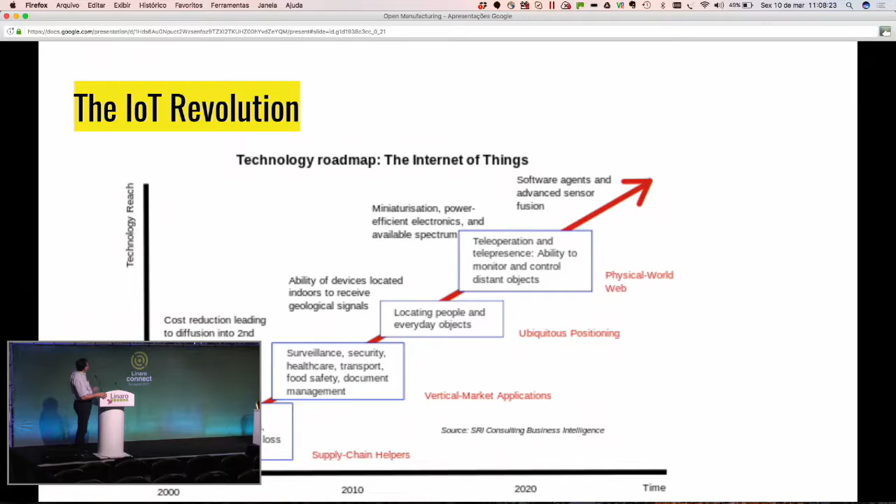So that is the IoT revolution in theory, but in practice we know that will not work. Why? Because of the gap. Mind the gap.

At the same time that SoC complexity grew almost 60% per year, we—Linaro people, software designers—we cannot pace the same rate of deploying software, boards.

And before, when people talked about the design gap, they thought only about software. But the gap is not about software, it's about everything, the whole ecosystem: software designing, manufacturing, certification. We need to put all pieces together.

When we see the hard time that we have in our companies, it's because customers don't want a single LG, Samsung, or Huawei cell phone solution. They want diversity. And sometimes we are anxious about this diversity because we know how hard it is to deploy this product diversity.

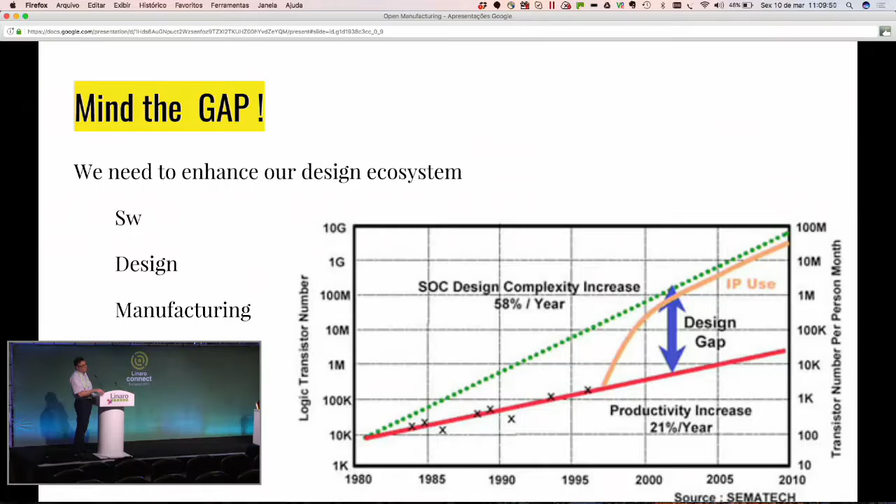And that's about the gap. The design gap is much bigger than only software. It's about everything, including manufacturing.

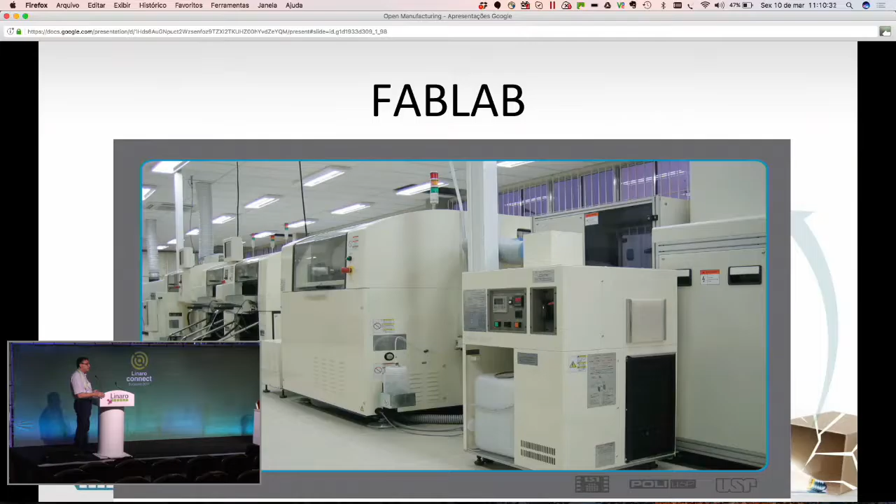So here's our Fab Lab. Yes, it's a factory, a state-of-art Panasonic manufacturing line, but also a lab, because we don't want this machinery targeting high volumes. That's the responsibility of traditional industry. What we're targeting here is innovation—how we can take advantage of this infrastructure to help people who want to do innovation in the field, and sometimes don't have the means to work on a small series.

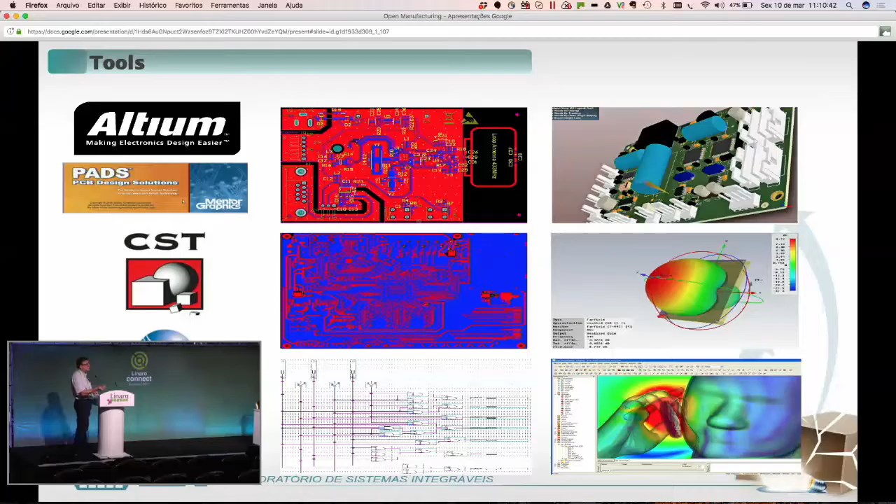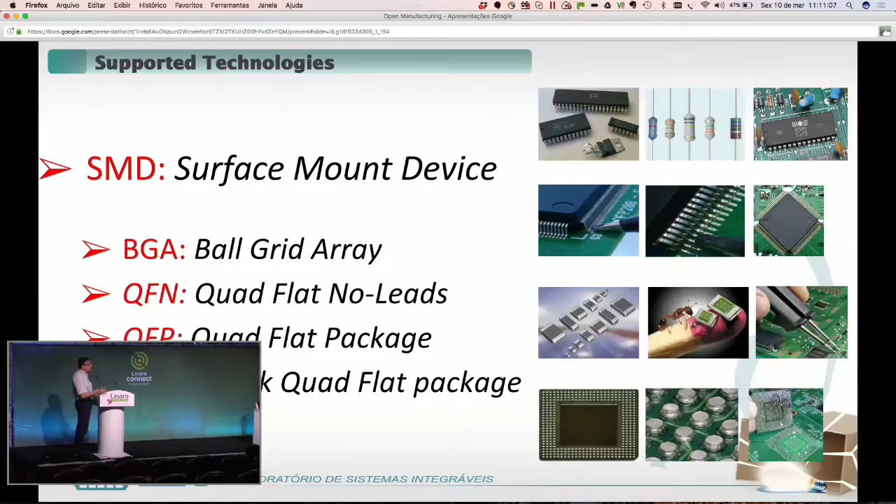So here is our infrastructure. We have everything from layout, schematics, RF simulation, to manufacturing, including screen printing, pick and placement, and the oven. Particularly, we are not interested in things industry is already doing, so we don't do PTH, but we do a lot in terms of fine pitch SMT. Just to give an idea, we can inject 60,000 components per hour, because these machines are fast.

Probably you've heard about Industry 4.0? Have you had a chance talking with Panasonic, Fuji, or Siemens people about the implications of the 4.0 wave in this industry? It's amazing—production rates will be even higher—but there's a big mistake because everyone is looking for low cost, high productivity, high quantities. The problem from the design point of view is still there. Sometimes we need small quantities in the early stages of the design process, and that's something big companies don't take care of. And that hurts us, the Linaro community, the design community.

So what's cool is that as these big machines are also becoming smaller, we have high precision small machines that can do really small series—let's say 10 boards, 5 boards, 20 boards. We have this big machine that's 25 meters, almost 100 feet, but also these small ones. That oven is this size, and very precisely we have the same resources as the big machine in these small ones. Everything is targeted at quick prototyping, quick deployment, not only for research but achieving industry standards.

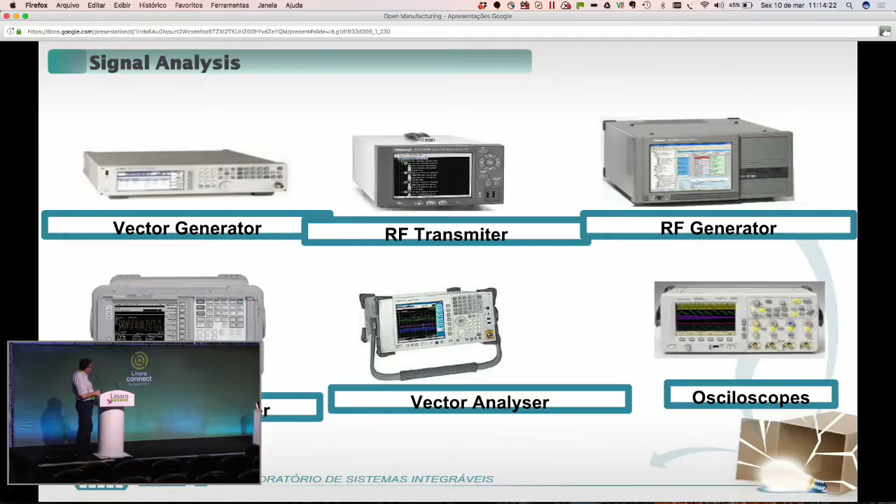So a lot of equipment for certification, including wedge bonders, microscopy, three-dimensional volume-based analysis, PCB routing, oven—we have all available. And finally, we have equipment to do signal analysis too.

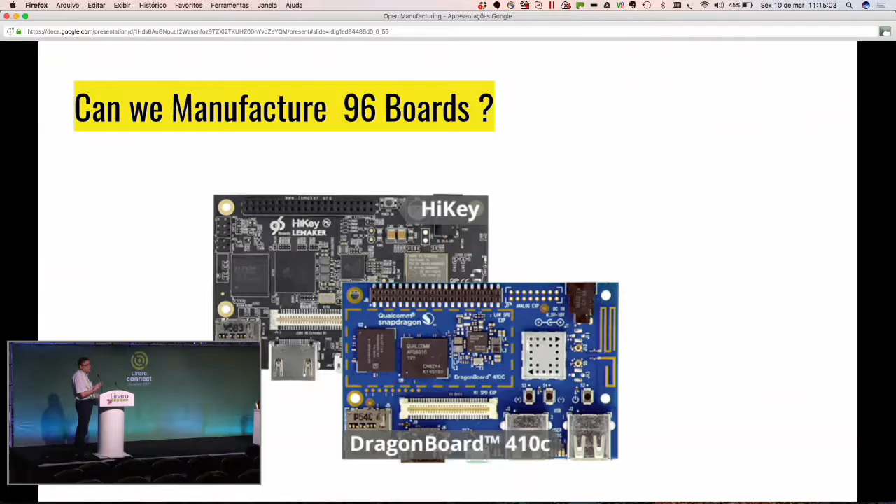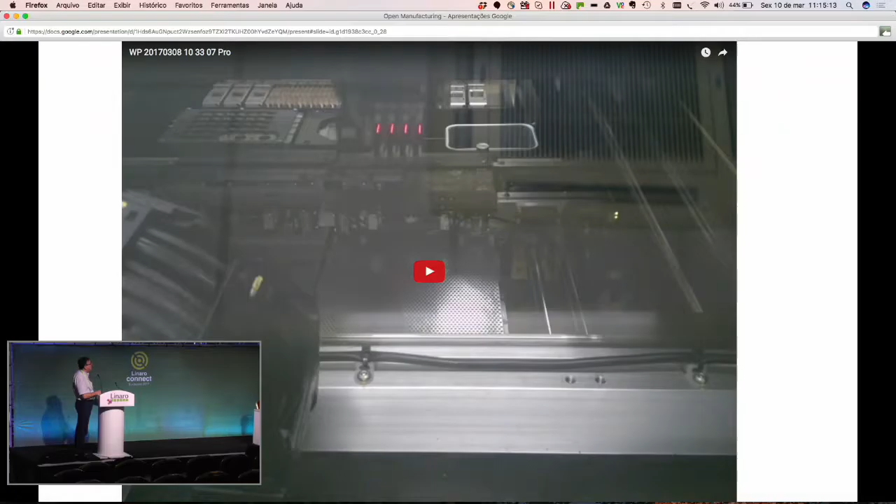So many people are asking if we can manufacture the 96 boards. We say yes. At this moment we are manufacturing some boards from a company named LeMaker. Unfortunately they are not here today, but we licensed from them the design of the board named HiKey. In our machine, using only 20% of its capacity, we are able to manufacture a board in only 75 seconds. So in less than one hour we can manufacture something like 45, 50 boards, and then certify them. I have a video about manufacturing this board—it takes 75 seconds, but it's quite boring. I won't show that to you.

So that is it. In the design gap—before, people were focusing only on software problems—we want to enhance and open up the process of manufacturing, and share that with the community here. So if anyone here has limitations facing manufacturing, please send a note to me, and eventually we can help you on this challenge.

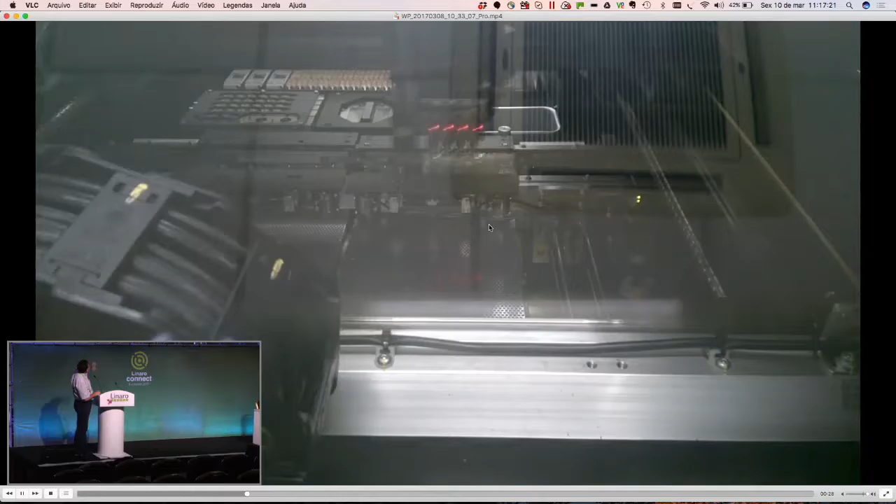So we have 6 feeders, and that is just one. Oops, I'm sorry. So what they're doing here is placement positioning, to test the quality of the precise positioning. We have 8 heads per feeder. And here is the manufacturing of 4 LeMaker HiKey boards. We are using the same component because the idea is to do a dummy manufacturing run to evaluate the positioning precision.

That they did yesterday, and today we start to position the real components, and then later this afternoon we'll do the X-ray to evaluate the solder quality, because we are trying to guarantee 100% yield.

And also we already profile the oven, and that's something really cool. We have a profiler with 16 channels. If you have some very special certification needs, we have the precision tools to do that. And again, we don't need to compete with high-end, high-volume companies. The idea is to keep small series just to promote innovation, so you don't need to wait in the queue for that.

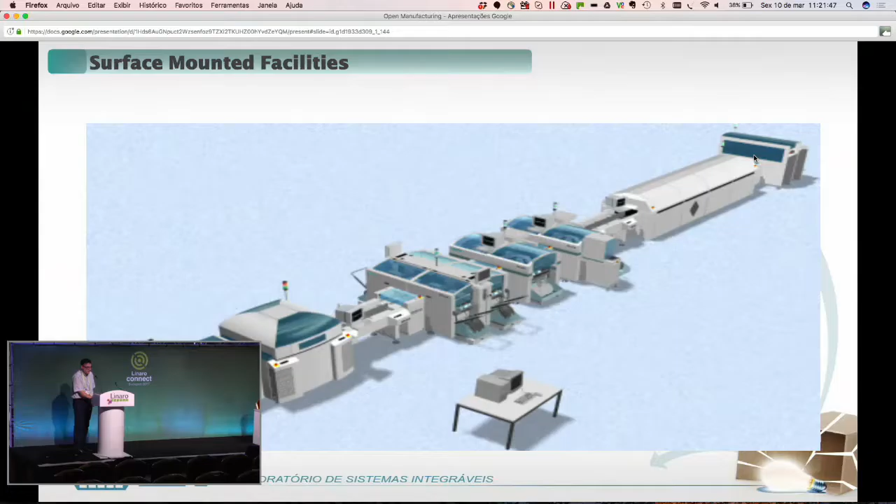And did you consider maybe taking some share of your production time, run time, and offering the maker community a cost-effective service for production of PCBs, for example? Couple hours a week, you accept some orders from real people, or who walk the streets, who want to make some PCB, and make it for them.

In our model, we are the university, so we have problems making money. That's why we just started up 3 companies, and these companies are responsible for the business. One of these companies just built a business model where their costs for small manufacturing are reasonable, and in fact it's cheap for a small series. So we have this dual mode.

We want to support the maker industry, but you know, sometimes makers don't have a methodology behind them, and here we need to keep the methodology. So the university is the guardian of the equipment, because we need to have our equipment certified - we need certifications for FCC, CE, Brazil. Because of that, the equipment needs to be certified, but we are opening part of the production if the community obeys the certifications, because it's reasonable and cheap - in fact, it's not expensive.

And we also have this small company that is targeting, from the business point of view, manufacturing small series for business purposes - when you need, let's say, 50 boards, 60 boards, 100 boards. During this week, when we started to share this idea, we heard horrible stories of people trying to do a small series, even from big companies like Qualcomm and others. So we structured ourselves - I am from the university, I am also the chair of this NGO, but I will be very happy to introduce you to these companies that will take care of the business part, including the business for the makers, because we want to make clear to makers the whole structure that considers this too. When we talk about the maker space, it doesn't mean it's free - there is also cost associated.

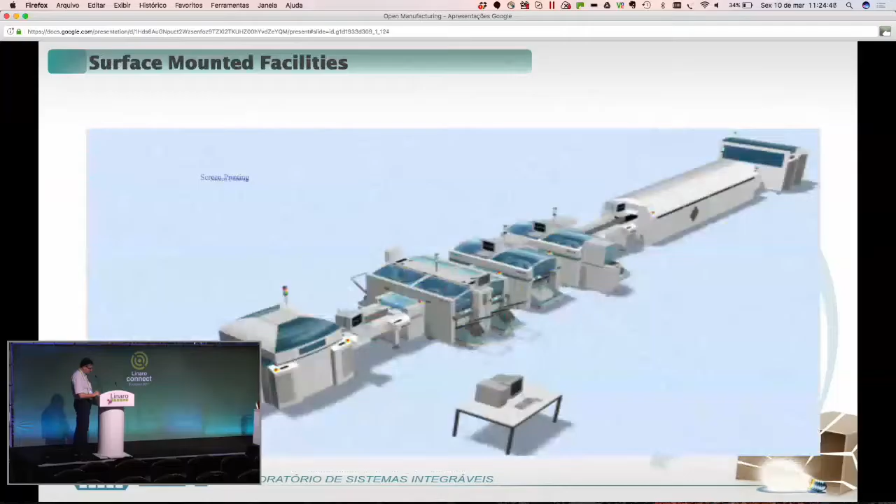That's a lot of money for a person to have in their home. But if you had a maker lab, or a bunch of maker labs put together, they could afford to buy those and then spread the cost across everybody who would use them. The issue is trying to get people to create the input to be successful in creating their design.

That's one of the things university could help with, to help them understand how to submit your designs to that style of lab so you will be successful. And also to help you set up with an agency like Arrow or something like that to purchase the components. So when you submit your design, you'll be able to get components from Arrow delivered there, they can be manufactured, you pay a certain amount for manufacturing, and you get 1, 2, 3, or 10 boards out of that.

Once you've done that, now you've got something which you can submit to a larger machine, if you wanted to have 100 boards, or 200 boards, or 300 boards. So developing that type of flow is something that would be very good.

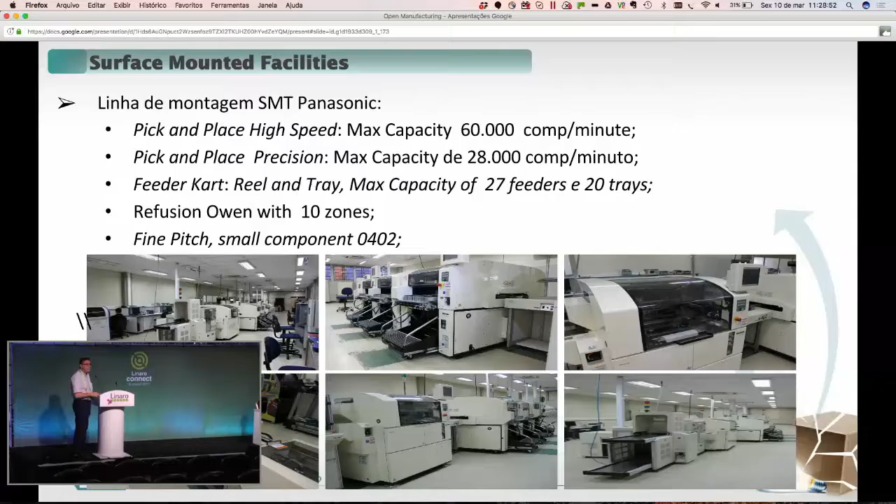This machine is ultra complex. We need to have a visit from Panasonic every month to check everything. And now we're discussing with Panasonic, since we are targeting this small scale thing, we want to put the machine on the cloud so people will be able to track the process.

And also, we have a partnership with a German company named LPKF. These two companies are our partners. They need to visit us every month just to keep the machines perfectly running.

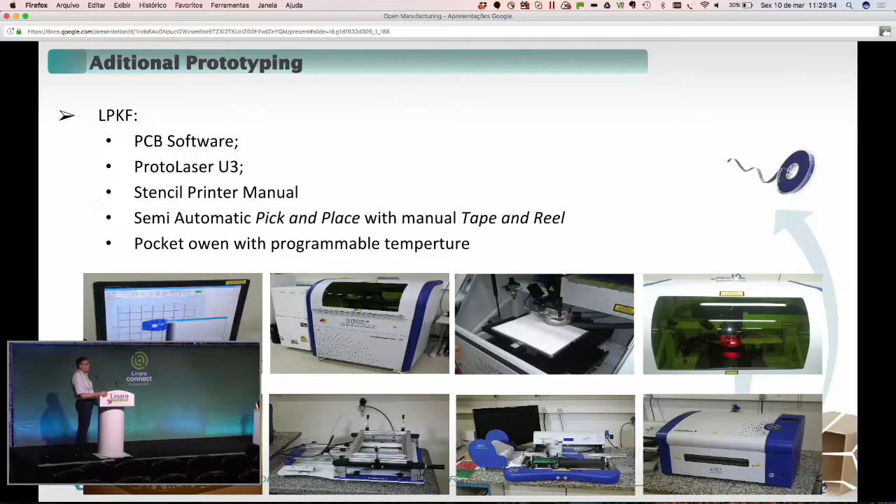Because doing SMT mounting these days is almost microelectronics. The fine pitch components are almost the size of a hair. So precisely positioning them and keeping them tied and working correctly takes a lot of cost. So it's not just about the cost of ownership, but also the cost of maintenance that is very high in this infrastructure. But again, before, all this key knowledge used to be hidden in some high-volume corporations, and we believe that regarding the design gap, we need to bring this to engineers like us.